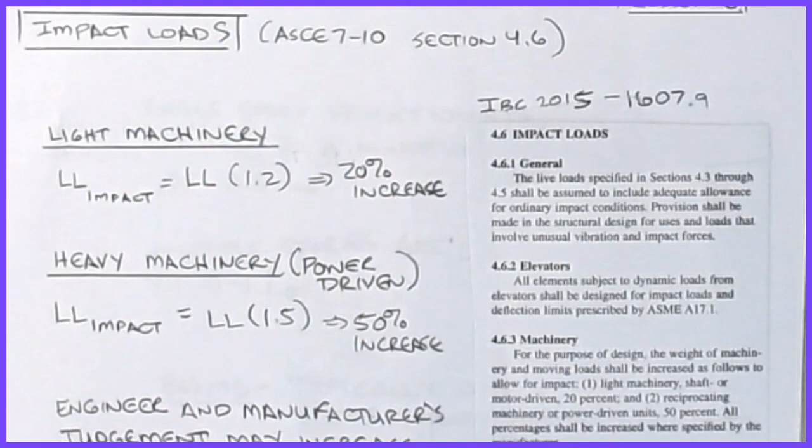So the first topic that we'll talk about is our impact loads and the way that the ASCE 7-10 attempts to deal with those. This is located in section 4.6, and I've copied part of that text for you just so we can reference back to what it's saying. Impact is a load that has some form of energy when it hits a structure, or that it imparts into a structure. It could be like a projectile hitting a structure, or it could be caused by any sort of moving machinery or motors that are being power driven, that will exert force, usually in a cyclic behavior, but not always, into a particular structural form.

Now, impact is very complex. Without getting into structural dynamics, it's very hard to analyze logistically how machinery or impact is affecting a particular structure. Structural dynamics says that vibration and impact response are related to not only the mass of the structure, but also the stiffness of the structure. So a steel beam will behave differently than a concrete beam when the same load is applied to it in some sort of vibration or moving pattern. And so there's a lot of assumptions that have to take place. It's very involved and mathematically intensive to come up with the true form.

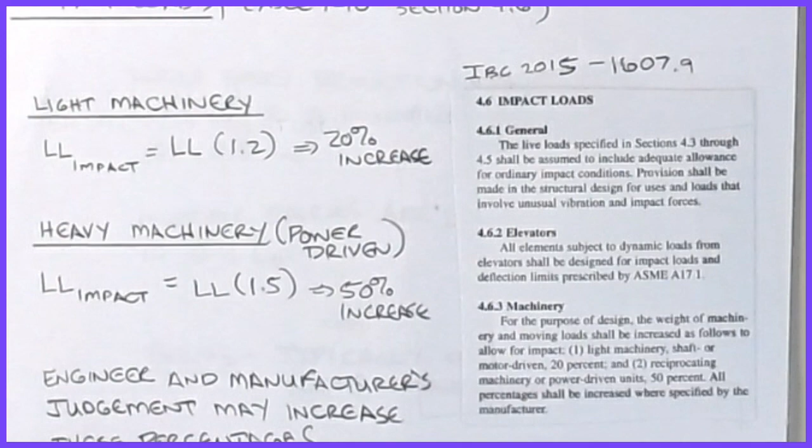So to help us solve this, ASCE 7-10 has some smaller subsections and some assumptions that they based off of practical experience and practical theory, and those are what we're going to focus on for this series. Maybe when we do a structural dynamics seminar, we'll come back around and address this in more detail, but for most engineers doing normal everyday structures, nothing special, nothing unique, just your standard run-of-the-mill type structure, these will give you a good first guess as to the increased loads that are needed.

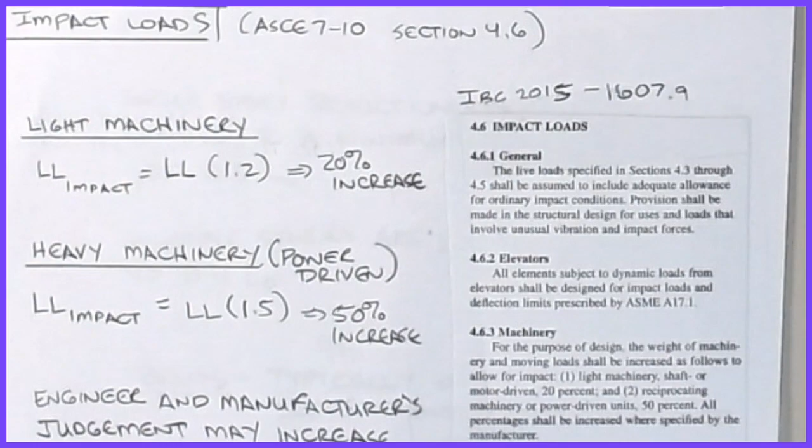So for impact, like we said, this is located in section 4.6 of the ASCE 7-10. You'll see that up at the top on the notes. But it also correlates back to IBC 2015, and 1607.9 is where you find that. The way that the ASCE code handles impact is they basically break things down into: is it a light machinery or is it a heavy machinery? So you've got to watch pretty closely the wording of the machinery types, and what we're looking at is a printing press, an aggregate screen, or some sort of motor driven device that's causing these vibrations or impacts in the floors.

You'll notice that elevators would definitely be a machine that meets that standard, but those are designed according to a different standard. To get into those, you'll have to go find the ASME A17.1 provisions, because not only are they designed for impact loads, but they're also designed for explicit deflection limits. We'll talk more about deflection limits in a later video, but elevators are kind of a special animal, especially because they involve humans, whereas the machines that we're looking at would be some sort of industrial equipment.

So the way that impact is handled is that the industrial machine is split up between whether they're classifying it as a light machine or some sort of reciprocating or power-driven unit. For a light machine, which could either be shaft or motor-driven, they're going to require a 20% increase to the live load. So if you know that the live load being put out by this machine is 40 pounds per square foot, you're going to increase that 20%, and the one that you're going to run your models for these pseudostatic loads for impact would be 48. That would be a 20% increase of that.

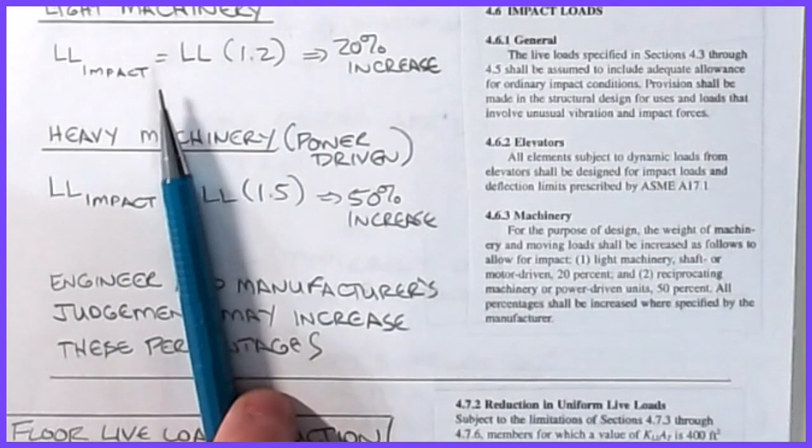Whereas if it's a heavy machine, which is some sort of reciprocating machine or a power-driven unit, 2,000 RPM or something just very, very large. And again, they leave a lot of this up to interpretation. Well, what do you do if you're kind of in between the two?

You have to use your engineering judgment to understand the type of machine that you think you need to be designing for. What lets you sleep at night as you start to do this? Now that being said, recognize that there is a 30% increase between light and heavy. So the heavy, if it's a reciprocating machine or a power-driven unit, they're going to increase at 50%.

And what they're worried about with these power-driven or reciprocating machines is that resonance effect that we've talked about a little bit, in which, as you deflect things, the deflections get bigger and bigger, but that's because of the cyclic nature.

Where we talked earlier about the structural response being related to its mass and its stiffness, there's also another factor, the frequency of the force being applied, and something special happens if that frequency of the force starts to match that ratio of mass and stiffness, or the natural frequency. Now, that's not the true formula for natural frequency, but those are the factors involved.

And so, if those two numbers start to converge to a singular unit, then deflections go crazy and start to expand. Technically they could go to infinity, but obviously structures have material limits.

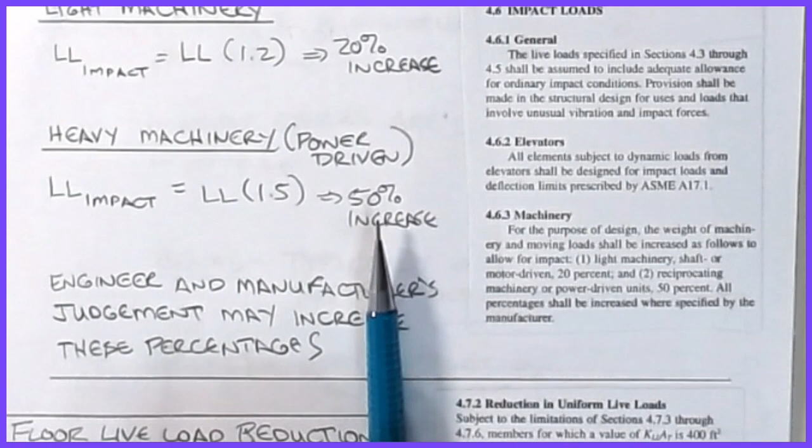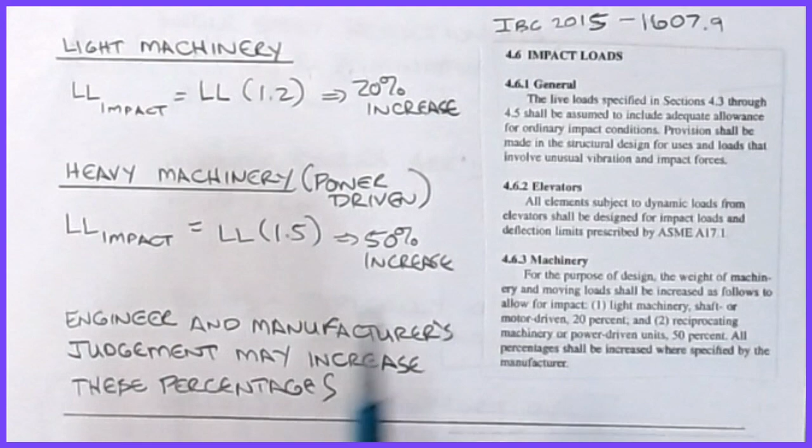Now, there's a lot more to this, but just so we have a sense of how much we're going to increase, we're going to be increasing either 20% or 50%. And again, it is up to the engineer and manufacturer's judgment. Technically, you could increase those percentages. If I knew I was hitting that special resonant frequency, 50% might not even be enough to design for. So that will cover us for impact. Next up will be live load reductions.

Our next section involves the concept of live load reduction. Live load reduction is broken up into two different subsets: one is for floor reductions and the other is for roof related reductions.

If you remember, we defined live load in an earlier video as a load that is non-stationary or has some variability associated with it, that it can move in or out, based on time of day or just the nature of the loading, it comes and goes. Now, live load does not include things like wind or snow. This is most often associated with people loads.

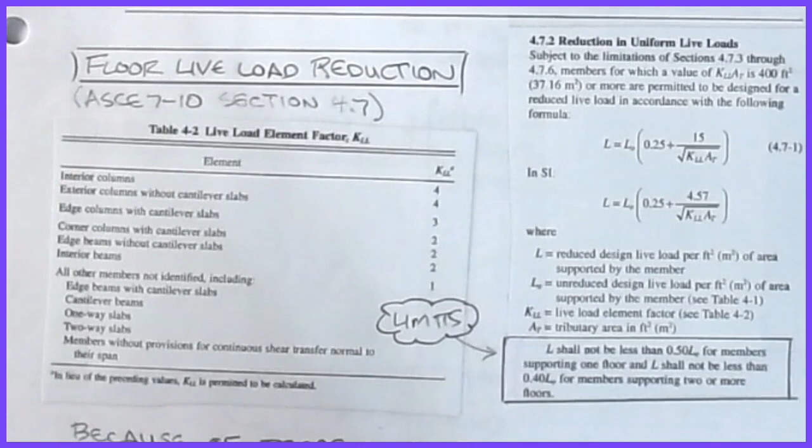Remember that there were some statistics behind the formulation of all of those numerical values. For a residential section or a classroom, we said live load is typically taken as about 40 pounds per square foot, and maybe the hallway outside was 80. With live load reduction, because they're based on probability, we have to look at things a little bit differently.

So I'm going to pull up a small example here. Suppose that we have a live load reduction set up between floor and roof, and let's say we're looking at 40 PSF. I know it's uncommon to get 40 on the roof, but let's just say there's 40 on either one of these areas.

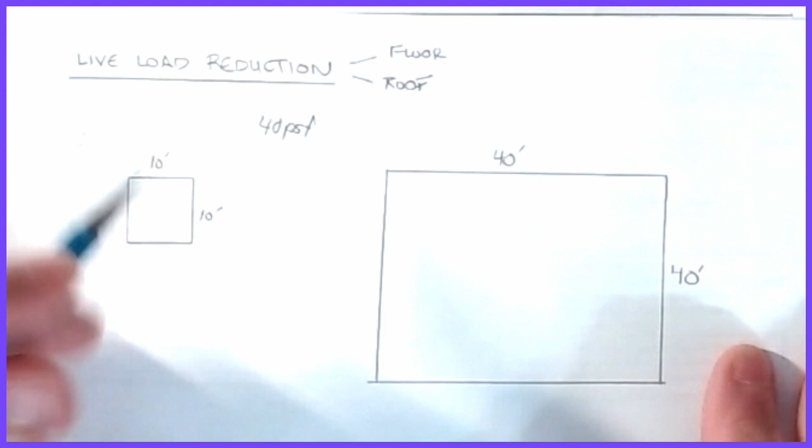If the area where this load is being applied is fairly small, in this case a 10 foot by 10 foot area, maybe a closet or a very tiny bedroom, the likelihood of seeing 40 pounds per square foot in this entire area is pretty large. Because if we take a token 1 square foot area, the probability of loading all of those 1 foot square areas in this 10 by 10 area could be pretty reasonable.

Whereas if this area is 40 feet by 40 feet, the probability that I load up all of these at the same time with that same load is insignificant.

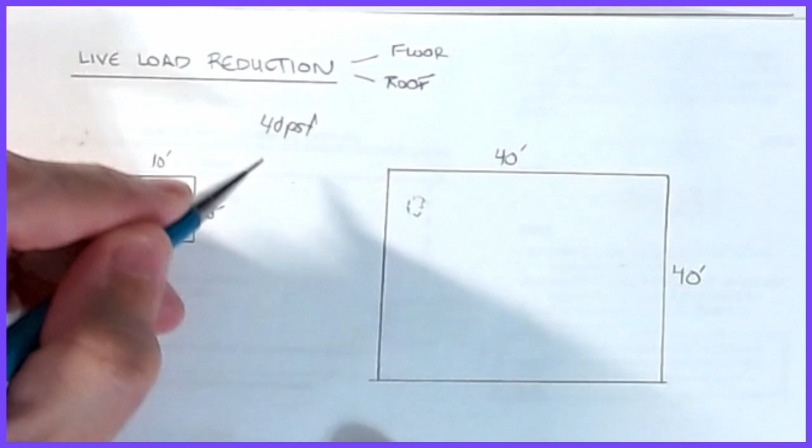The likelihood of that happening is a lot less. This room is a lot bigger, and suppose that you have 20 people that you're fitting in this room. I mean, we're not worried about fire safety standards or anything like that. But getting 20 people into this room, they're pretty well packed wall to wall.

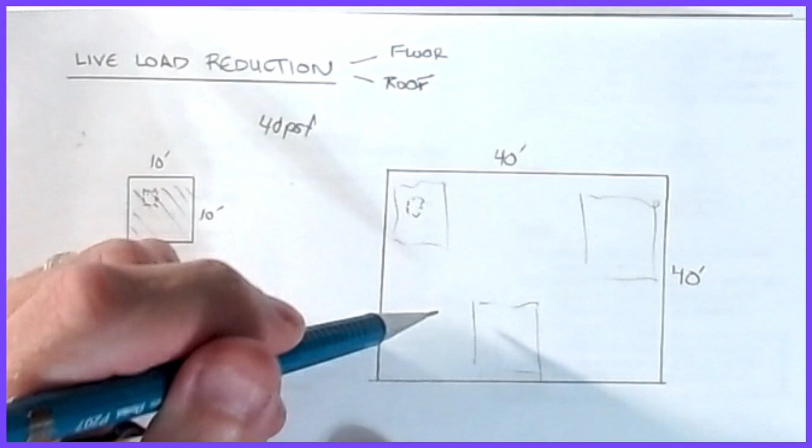Whereas here, maybe they're located over here, maybe they're over here. They all kind of move around, they congregate, something. But the odds of fully loading this whole area are very, very small. Okay, and so what live load reduction is, is an attempt to use some statistical basis to say, all right, we don't need to design this for as much of this 40 pounds per square foot load as we might this guy.

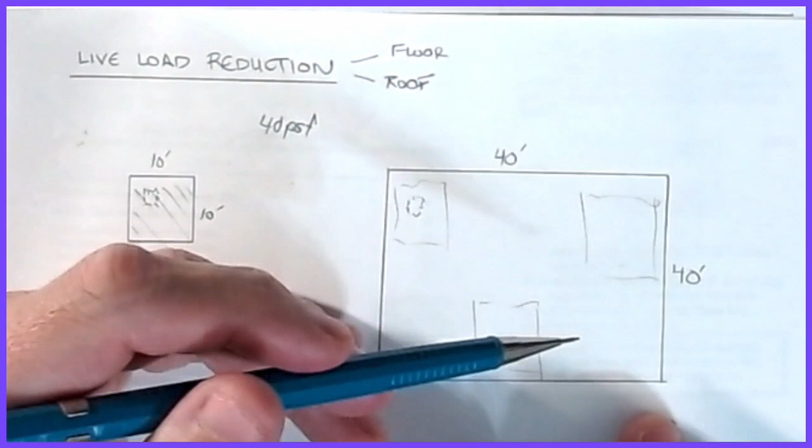Okay, now again, 40 pounds per square foot is still the base. It's just that we're going to reduce it based on the probability of actually loading this entire area. Now, if this is some sort of meeting area or a storage facility, there are some limits on when you're allowed to reduce and how much you're allowed to reduce. And that's the nature of what we're going to cover in this part of the video.

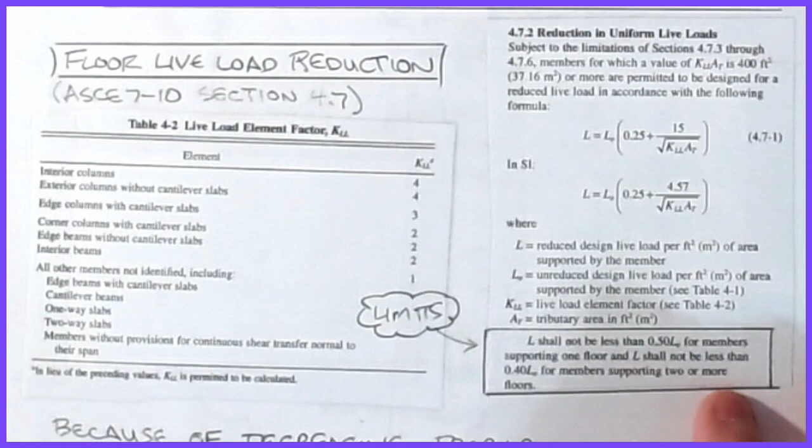All right, so even if it gets to, say, 400 feet by 400 feet, now it's an even smaller likelihood. So there's a correlation that exists between the area that's being loaded and the likelihood of that area seeing all of this load. And that's what these reductions are trying to do. All right, so let's talk a little bit about what the ASCE 7 code sets up as a prescription for it. We're going to start on 4.7.2.

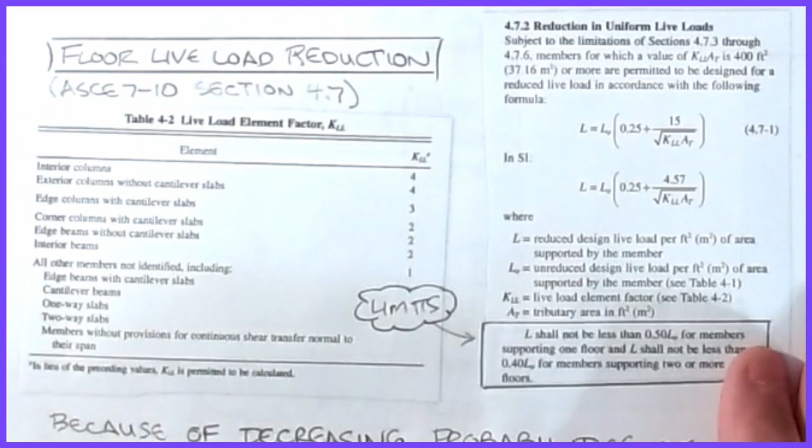There are two formulas associated with it. You've got the US units, which is the top one. That's the one we'll focus on in this class, but if you want the SI equivalent, there's the one below. Notice that all that really changes is this numerical factor, and that has to do with the conversion of AT, and we'll define what AT is in just a moment. The only parameters it takes are your initial live load L naught, a KLL parameter, and an AT parameter.

Now, AT we're going to use a lot in the coming days, and this is known as the tributary area. It's the load that's associated with a particular member, and we'll define those in just a second. All right, KLL has to do with the nature of the structural piece itself. Is it a primary member?

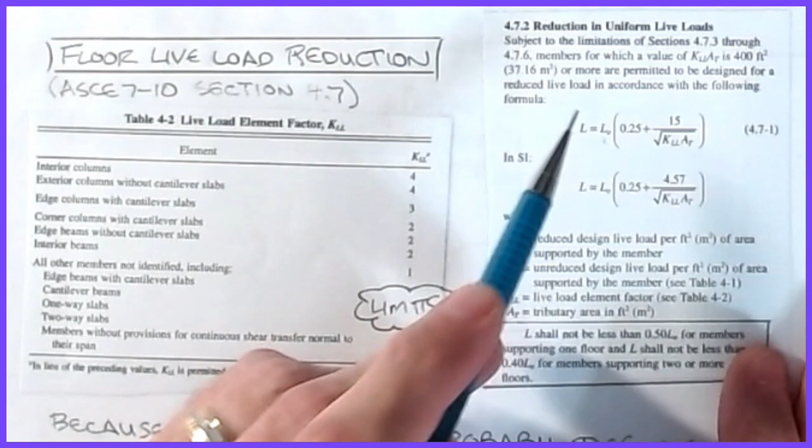Is it a secondary? Primary members being that if a primary member is damaged or removed from a structure, you have huge structural implications, whereas with a secondary member maybe you'll have a localized failure, but the rest of the structure is still standing. So think of, if you lose a column, that's a primary member because big portions of your building will come down. Whereas if you lose just a simple joist between two girders on one part of a floor, maybe you lose that part of the floor, but the rest of the structure will probably survive. That's what these factors are trying to account for.

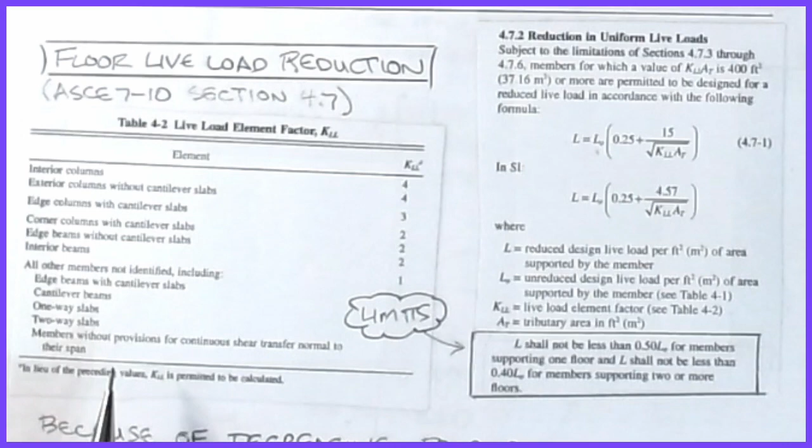All right, so this KLL parameter, which is the live load element factor, you can find in Table 4-2. They're broken down into different types of members. So if you are at an interior column, if we come back to our picture, that would be a column that's located in the interior of the region, something like that over here. So this would be an interior column. This would be an exterior column, and that would be a different factor.

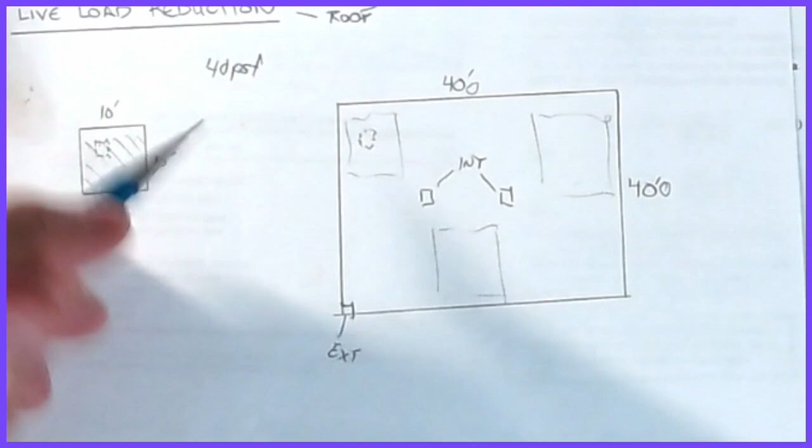So if you're at an interior column, if I lose one of these, the damage to the building will be significantly more than if I lose one of these exteriors, right? And that has to do with, let's just put a few more columns around the border here. We've got kind of a regular framing pattern.

Something kind of like that. That if I lost this corner column, you can see that based off of tributary areas, he's kind of responsible just for that portion of the structure, right? This guy takes that piece, this guy takes a whole lot, and this guy takes a piece there, okay? But realistically, all of the load that's here, and it's not exactly like this, but it tends to want to go to the nearest column, okay?

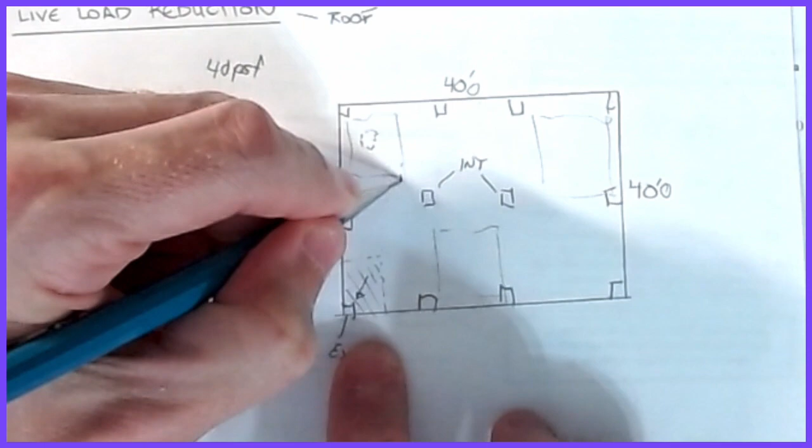Whereas if I go to an interior column, and take this as my shaded region, all of this load tends to want to go to this column. Okay, now again, this is an idealized approach, and we'll talk more about these tributary areas. But that's why you can see that an interior column typically has a whole lot more area associated with it than these exterior. Okay, now the shaded region I've showed here, this is the AT value.

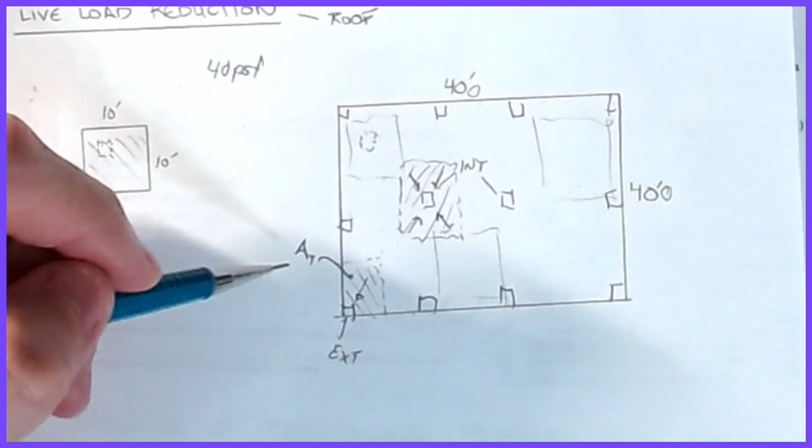Okay, so what it does is it takes basically half of the distance between this direction and half the distance between this, and says this guy will cover half of it. That they're all working equally. Now, again, there are some assumptions that have taken place. We've assumed that the columns in the structure are all about the same size, that one isn't massively oversized compared to the others. Just normal structural type of thoughts are occurring here, okay? And so that's how we start to calculate these AT values.

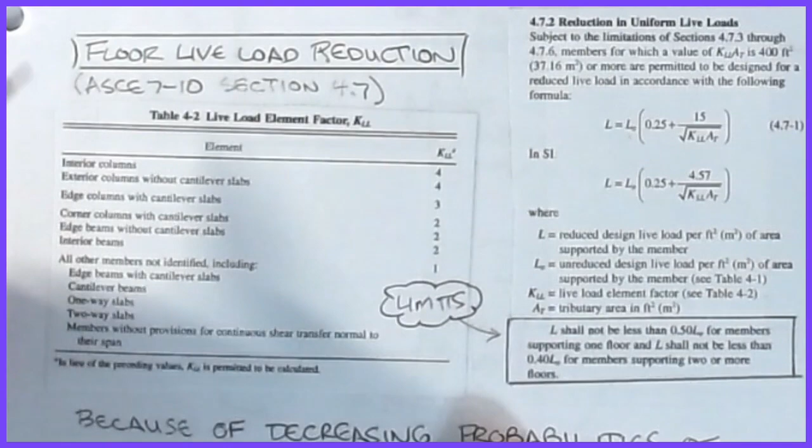Okay, so based off of that area, the shaded region that we're talking about, and then these KLL factors that we're going to show in these tables, you can see that an interior column has a KLL of 4, okay? An exterior column, and this is without cantilever slabs, meaning there's no slab hanging over it that gives it extra load, is also a 4. Okay, with cantilever slabs, it gets a 3, and so forth and so on.

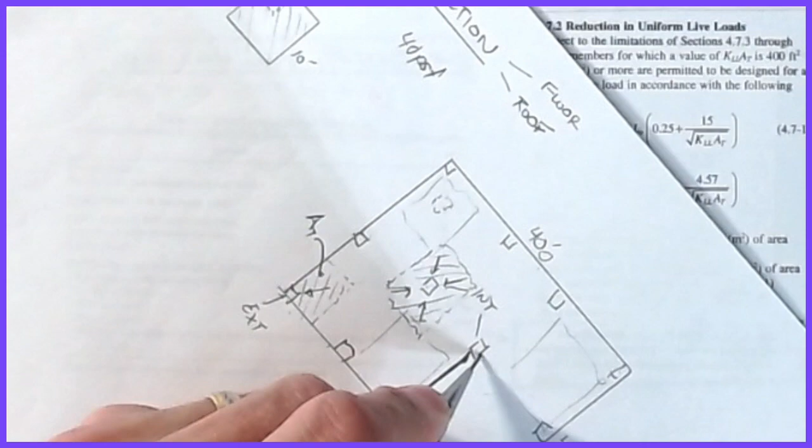You can see that interior beams, so if we look at our shape, this would be considered as an interior beam, a member that connects those two columns, okay? And then even get a few girders laid into our building here. Let's just say that we're taking this beam here in the middle. Okay, that would be an interior beam. Okay, whereas this might be an edge beam over here. So this is an interior. Okay, and this is an edge.

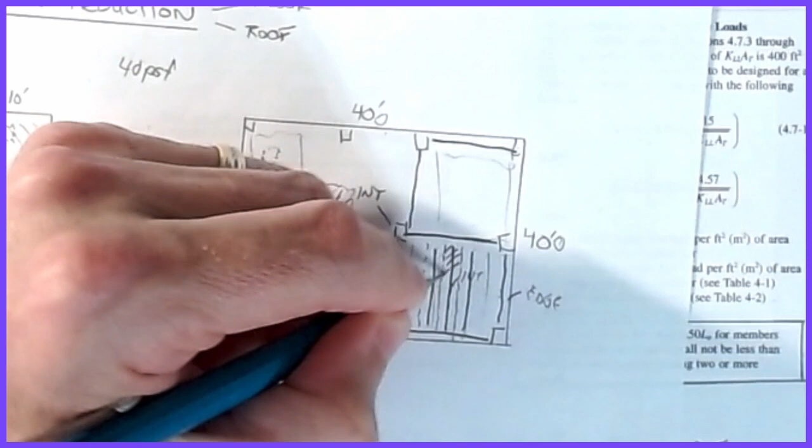Okay, so what happens with tributary areas on this, because typically there are multiple beams running in the framing of this thing, that if this is, let's just draw another dark one in here. Okay, then the tributary area associated with this guy would be that little portion there. It's half of him to his neighbor and half on both sides, both directions. Okay, whereas for a girder, like say maybe this guy, so let me pull this down a little bit.

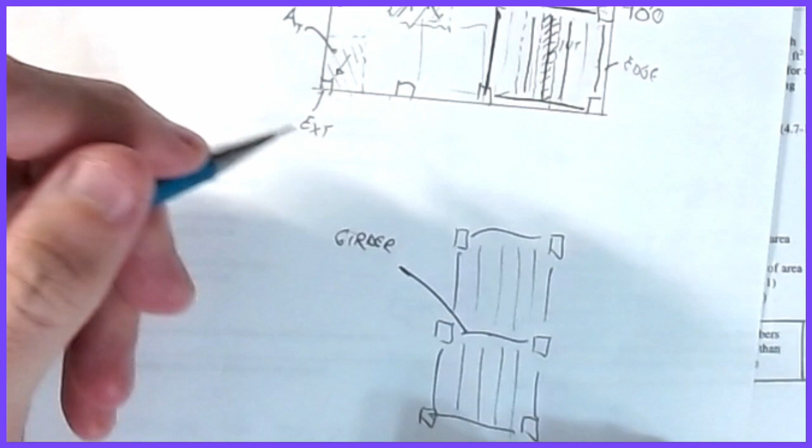And I'm using squares just to kind of represent my girders. Let's look at tributary areas associated with this guy. And again, we've got a whole bunch of framing that could be happening where this girder is holding up a bunch of members. If I'm looking at this piece, we would call that a girder. All right, and his tributary area is that any load that's out here, the load goes from the slab into the joist, and then a little bit goes towards each direction, that he becomes responsible for half of the area between him and his next parallel neighbor. All right, so that would be his tributary area.

And you can see that girder gets a whole lot more tributary area because it's collecting load from a larger number of beams that are sitting on it. Okay, so you can see that even though they're kind of in the same floor area, the area associated with this little sub beam is not nearly as much as what's happening to the shaded area on this girder, right? And that should make sense, right?

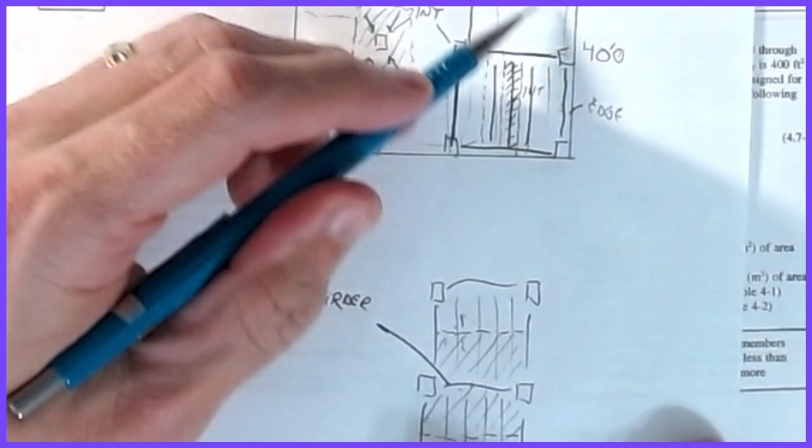Because if I lose this little guy, the rest of this floor is still safe. But if I lose that girder for some reason, now we've got a real problem that all of these floors come down, okay? And so that's why this area associated with the member, this tributary area, is such an important, crucial idea as we start to look at the loads.

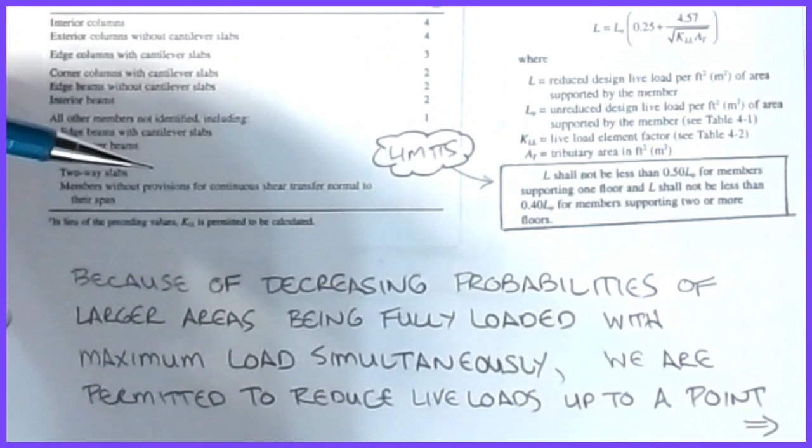Okay, all right, so with that being said, we've pretty much defined our parameters for the live load element factors as well as the tributary areas. Okay, there are some limits that are set forth in what's allowed, or how small can you go, because if we go back and look at our formula here, you can see that AT is in the bottom. So if I had an infinitely large area, I could knock this term out completely.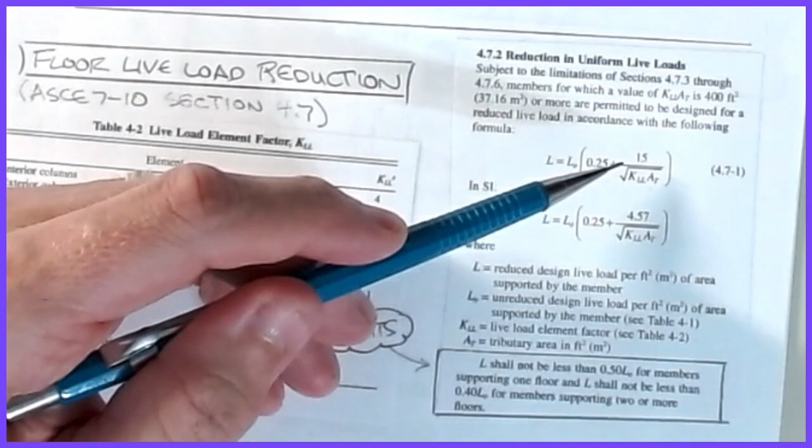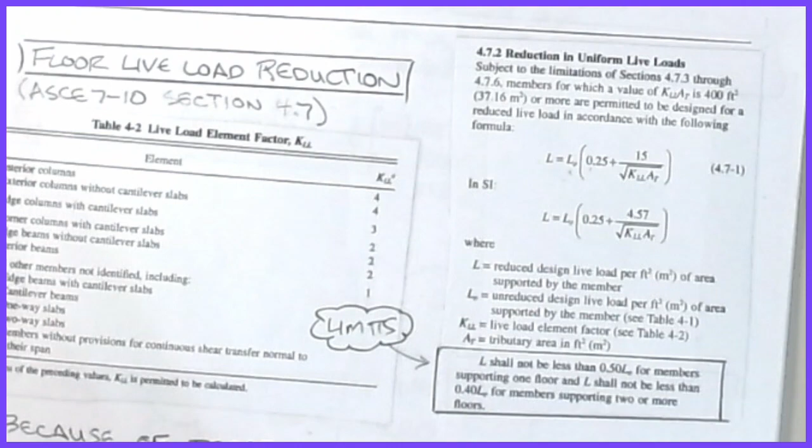Okay, well, they say that, and if I do that, then you're down to a fourth of the load of what you originally had. Okay, well, what's the magic number for AT? We'll talk about that in just a second. So while we're allowed to reduce, we can't get too overexcited and over-reduce it, take it too far down, because I can get to a load that's just not practical. So what kind of values are we looking at? That's where we're headed with all of this.

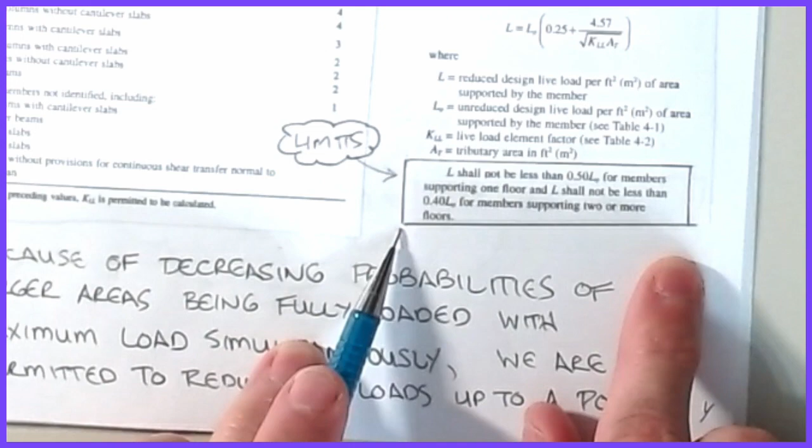All right, so anyway, you've got this table for the KLL factors, you've got the equation to work with. We're in pretty good shape for that. Now, the limit I have on this note is boxed. Obviously, it's not boxed in the code, but I pointed out this is where that limit is set. So L shall not be less than 0.5 L naught, so half of L naught, for members supporting one floor, and L shall not be less than 0.4 L naught for members supporting two or more floors.

Now, for most beams and girders, you're bounded by this 50% limit, but if it's a column on a multi-story building, beautiful quick drawings, right? Comes down and does something kind of like that. Well, then the column that's right here, while we talked about in an earlier picture that for each floor he was associated with a portion of the area on the floor, this column is affected by not only the load on the floor that he's holding up, but he's also being affected by the load of all the floors above him.

And so that's how we look at it, and that's what they mean by multi-stories. Because all this load is coming into this column, and then that load is coming down, and this is building up. As you get higher up in the structure, under the roof, you only have one floor. But for all the other floors, especially for this guy, I would have the effect of the floor above him and the floor above that, or all the floors, if this is a high-rise, multi-story building. That's what we're talking about by these multi-story objects.

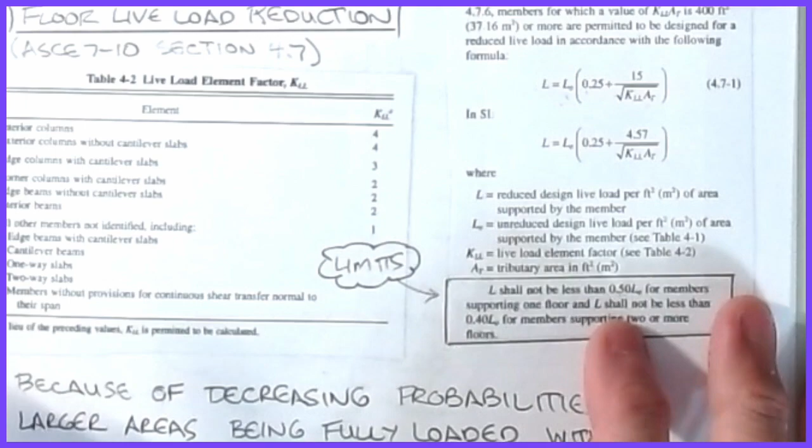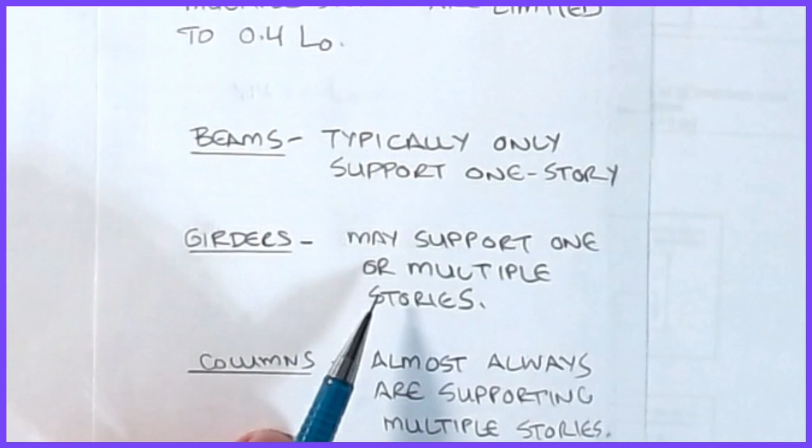But they're all still tying back to probability. So for that multi-story column, you're limited to 40%. Because again, they're saying, well, I may load up one floor, but what are the odds that I load up both floors in the case of that sketch we just made? So to summarize: single story reduction is limited to 50%, multi-stories are limited to 40%. Beams typically only support one story. Girders, depending on how they're loaded, may support one or multiple stories. It depends on, do I have a column coming down?

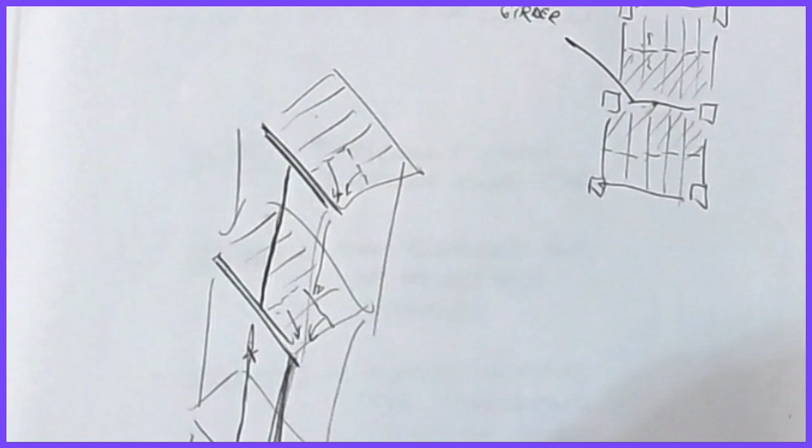Let's go back to this picture. Let's say this is the girder and we're framing things something like this. If my building is something like that, then this guy is only supporting his own floor. But if there were a column coming down here and not one below it, now he's holding up multiple floors. That's why they say a girder can, in certain circumstances, hold up multiple stories. Most normal construction, especially small 3 or 4 story buildings, runs columns all the way down. But not always. So we've got to understand how the load flows through the building when it comes to tributary area. That's why a girder can fall into both single story and multi-story approaches.

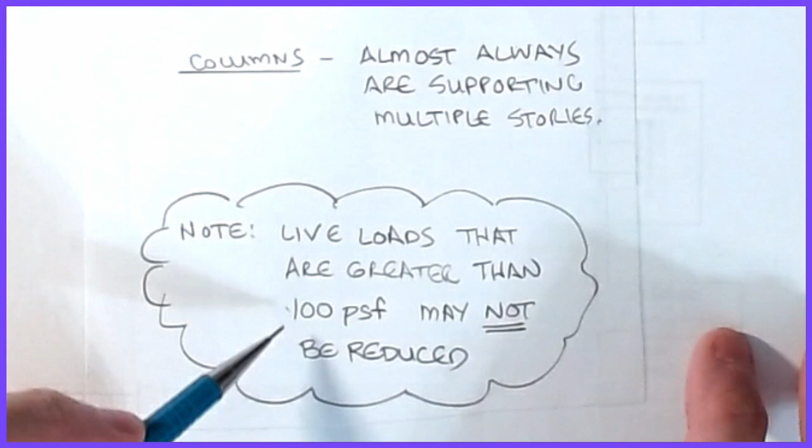Columns almost always are supporting multi-story structures. Now one other restriction that you see in that note is that live loads greater than 100 pounds per square foot may not be reduced. These are considered high occupancy loads. These are your meeting areas, conference rooms, warehouses, libraries, all sorts of storage facilities; they will not let you reduce them because these numbers are so large. But if you're dealing with an office building or a residence that's 40 or 50 pounds per square foot, you're allowed to reduce those. Okay, all right. Let's see.

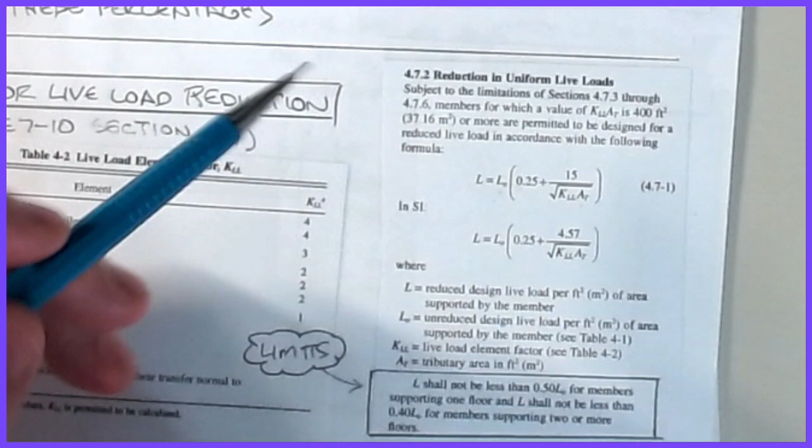All right, now, I do need to point out one last little tidbit that I forgot to say, and I apologize for that. Okay, how do we know what the limit is to being able to reduce? And that shows up in this upper paragraph up here. This has got a little bit of a glare. There we go. Okay, basically, if the product of KLL times AT is 400 feet squared, or 37.16 meters squared, you are permitted to reduce the load.

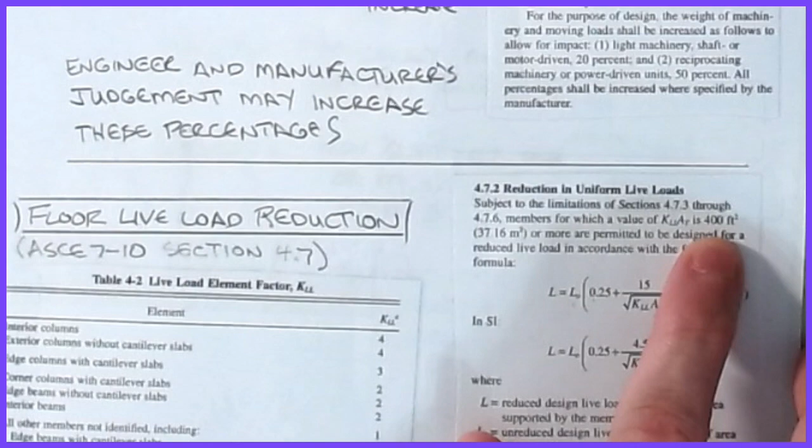Okay, so if you have a beam that's very short, say, or a column that has 100 square foot tributary area and it's an interior column, in that case you would hit that 400 number exactly. Okay, but again, AT is the area of those shaded regions that we were showing you. So this whole area associated with this girder that we looked at over here, that's AT. So if this was 10 feet and this was 10 feet and this is, say, 30 feet that way, my AT is 10 plus 10 times 30, which would be 600 feet squared.

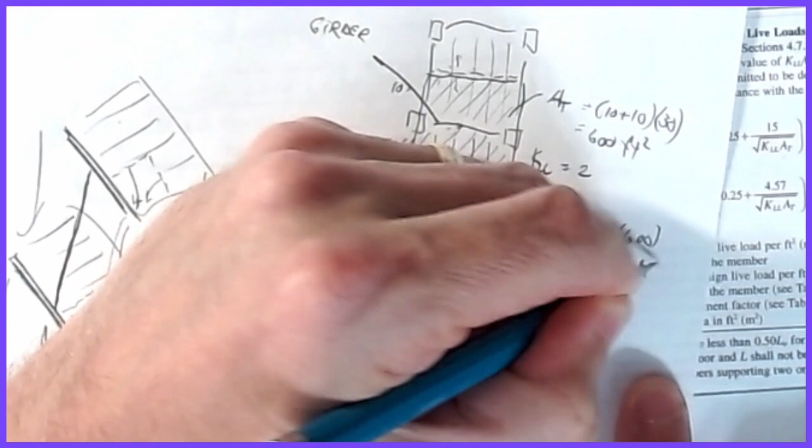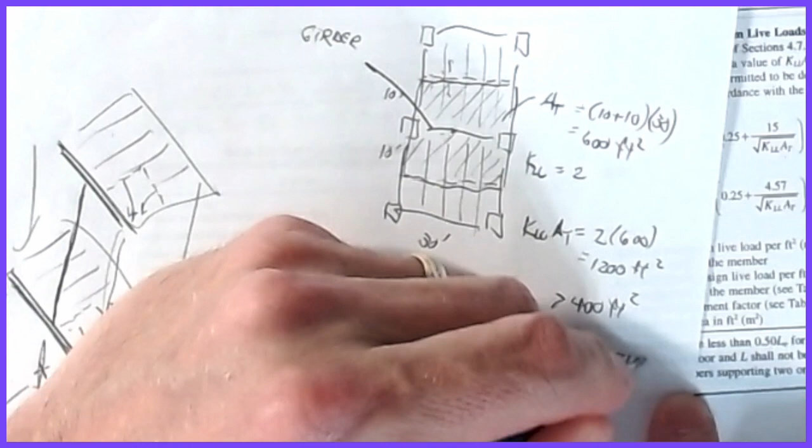Okay, my KLL for that interior girder, coming over to this table, we would be looking at an interior beam. Its KLL is 2. Then KLL AT is going to be 2 times 600, which would be 1,200 feet squared. Okay, that's greater than 400 feet squared. Therefore, our reduction is allowed. And then I could go in and start to reduce the number based off of this, and just plug into the formula, and you would get your percentage number.

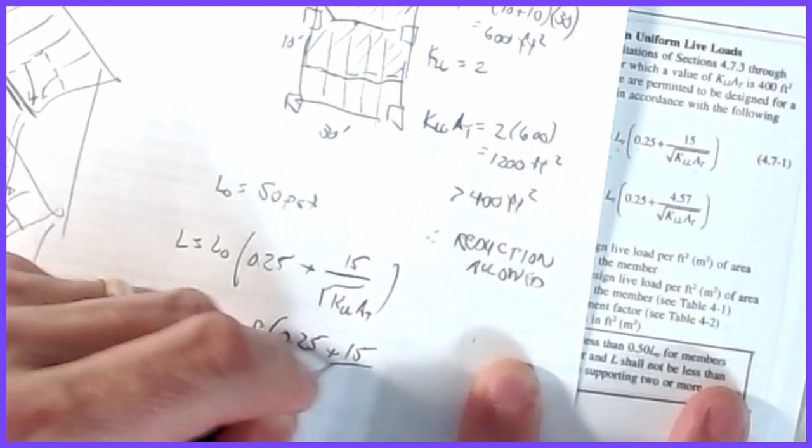Okay, so the original design, if this was an office, maybe it's 50 pounds per square foot. Okay, that's the L naught. Right, so if we just work a real quick example here, this would be L naught times 0.25 plus 15 over square root of KLL AT. This would then be 50 pounds per square foot times 0.25 plus 15 over the square root of 1,200.

All right, I'm going to pause it. I got my calculator here. Didn't have that handy with me. Sorry about that.

All right, I'm back. So this would be 50 pounds per square foot multiplied by a coefficient of 0.683. Okay, so if I multiply that by 50, 34.1 would be what you would design that girder for, based off of the tributary reductions.

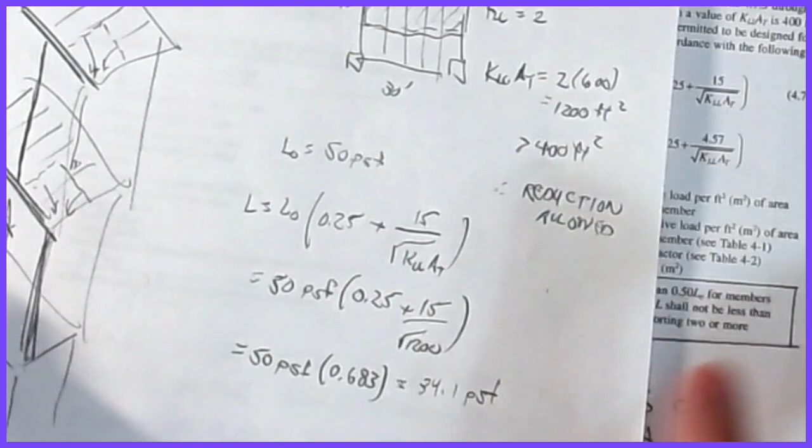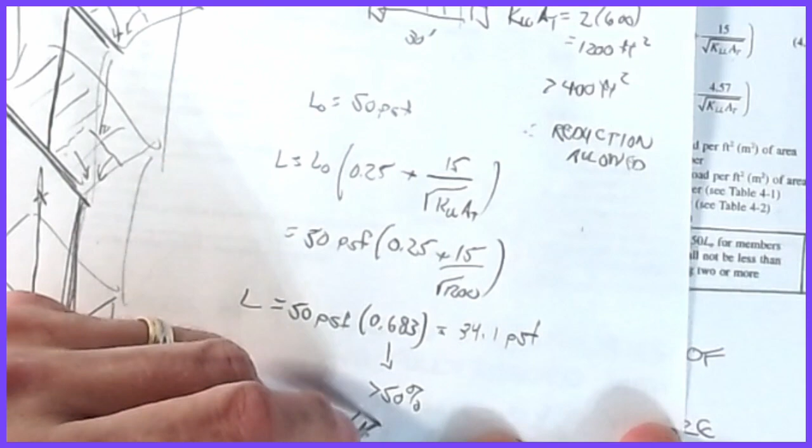Now again, we have to look at the limit. This number is greater than 50%, so then we're okay for our limit, because here's my L. My L minimum that you have to design for is 50 PSF times 0.5 for one floor, which would then be 25 pounds per square foot as the minimum that would be required.

So if I went crazy on the area and dropped this thing, maybe it was a lot bigger building, then if this number was, say, 28%, then I would be bounded by that limit. Okay, but we're still above the minimum, but that's why you've got to check both. So this is what I would model my structure on, 34.1 for a floor live load reduction scenario. Right? Okay, so anyway, that was kind of a crude example, whipped up on the fly, so I hope that made sense to you.

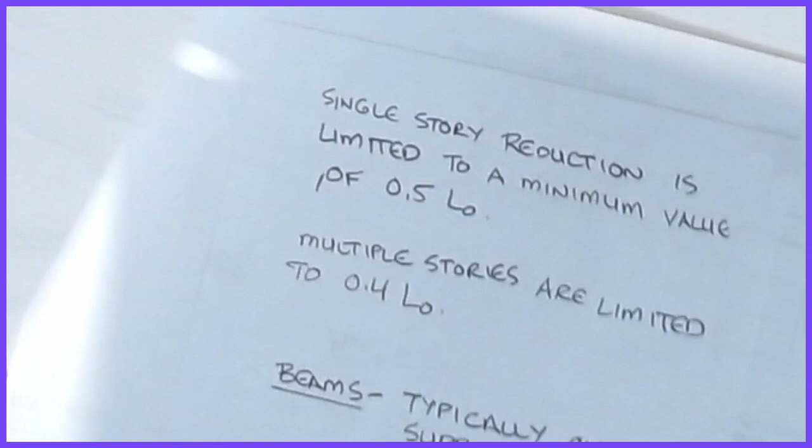The next piece that we're going to look at has to do with, get to the right page here, roof live loads. They're kind of the same way, but they're done a little bit differently. They have a little bit of a different setup to them because of some logical reasoning. Okay, so the typical value for a roof live load is 20 pounds per square foot. Now remember, we separated roof live loads from regular live loads because normally in most structures, roofs are restricted access.

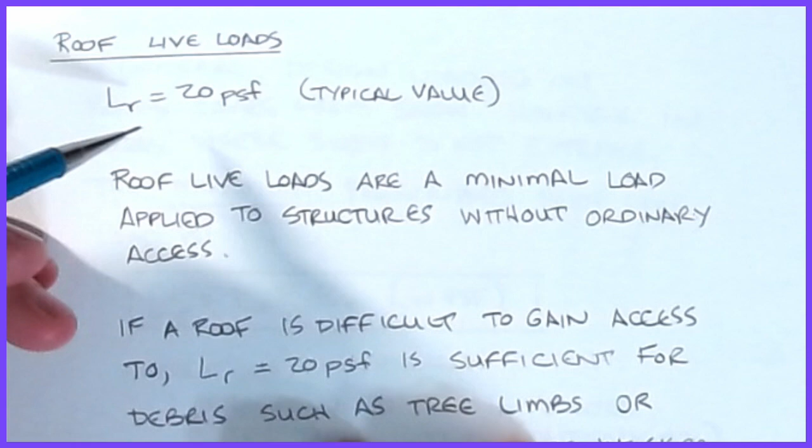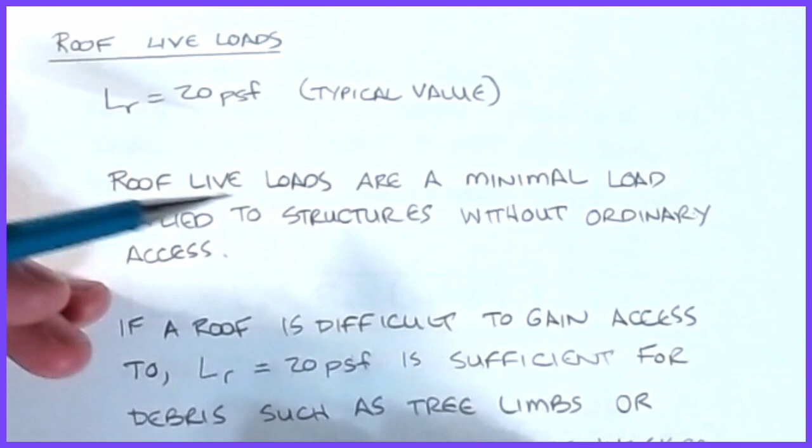This 20 pounds per square foot accounts for maintenance workers up there, the occasional tree limb that falls down onto the roof and sits up there, or a pile-up of leaves, or whatever the case may be. It's just a little bit of this kind of extra load, but it's not the 40 or 50 that you saw in a residence or an office building, right? Because I don't need that much up there.

Okay, and basically these roof live loads are a minimal load applied to structures without ordinary access. Now, by ordinary access, we mean that it takes some effort to get onto the roof of a building. Now, again, people can get on the roofs.

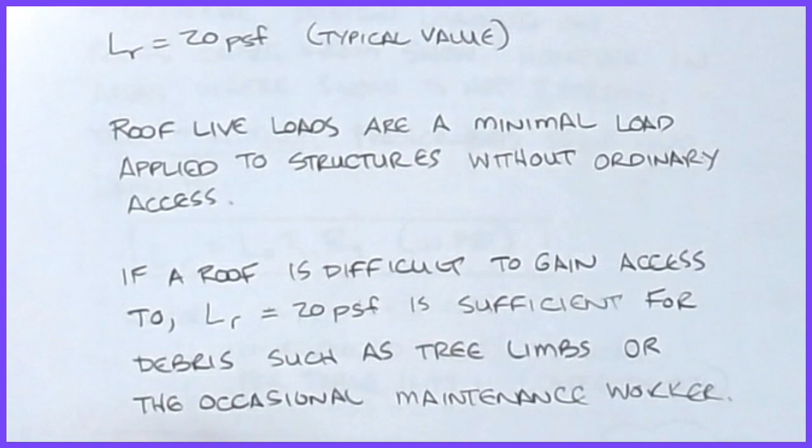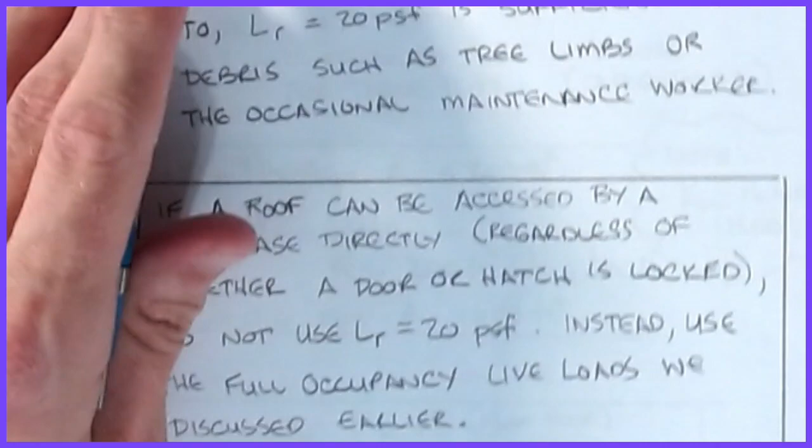I recognize that, but if you don't have a staircase going up to the roof, if it's a ladder that you're climbing, or there's a lock on the hatch that gets you to the roof, it's pretty safe to call that restricted access. Okay, so if it's difficult to gain access to, LR of 20 pounds per square foot is sufficient for our limits. But if not, if you have a staircase that goes up to it, if it has an observation deck, then I'm using the normal live loads associated with it, okay?

And that's kind of what I'm trying to say here. If a roof can be accessed by a staircase directly, regardless of whether a door or hatch is locked, don't use the 20 pounds per square foot. If it's got a door on it, or a staircase going to it, I use a normal design floor load on it. Right? Because at some point, somebody's going to go up there and say, hey, this is a great place to work, or a great place to sunbathe, or whatever,

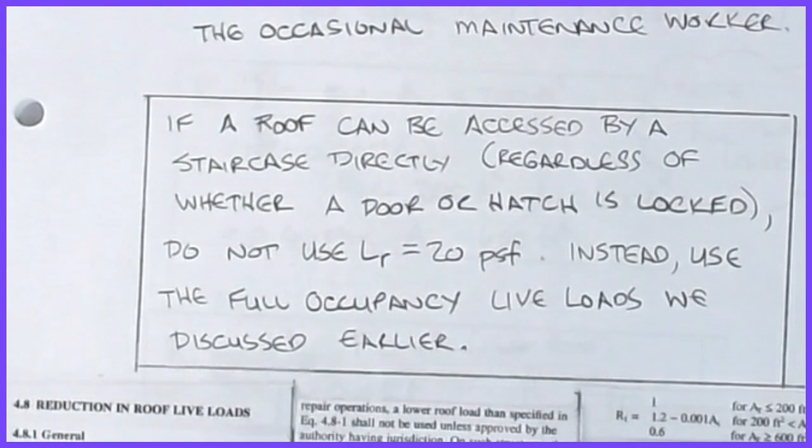and then they're there, and then all of their friends start coming over. And so again, engineering judgment on how hard it is to get on the roof. If you've got to scale a ladder, yeah, it's pretty hard to get on there. But if not, well, then you've got to kind of consider it that way. All right. So now for roof live loads, it's done in a very similar fashion. It's just that the formula is a little bit different. And so the reduction in our roof live loads is done in accordance with this.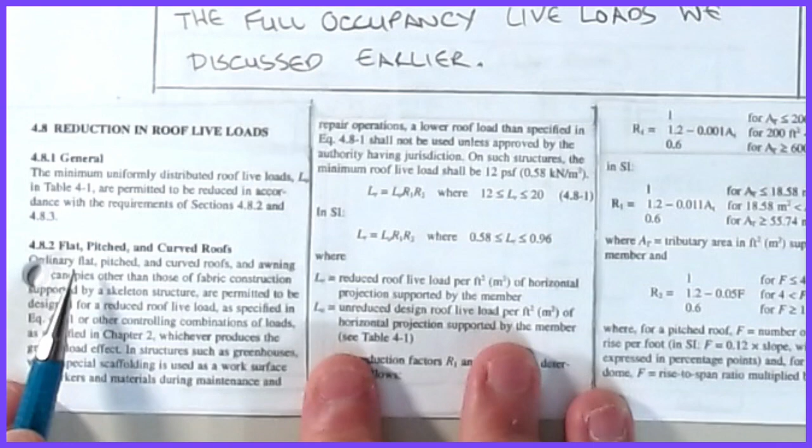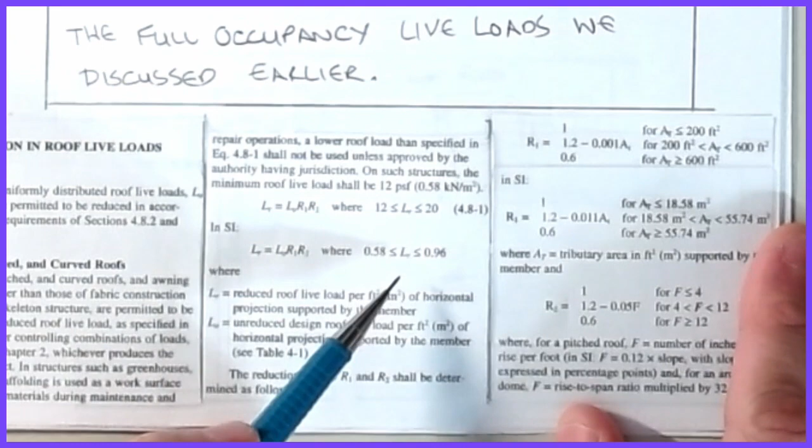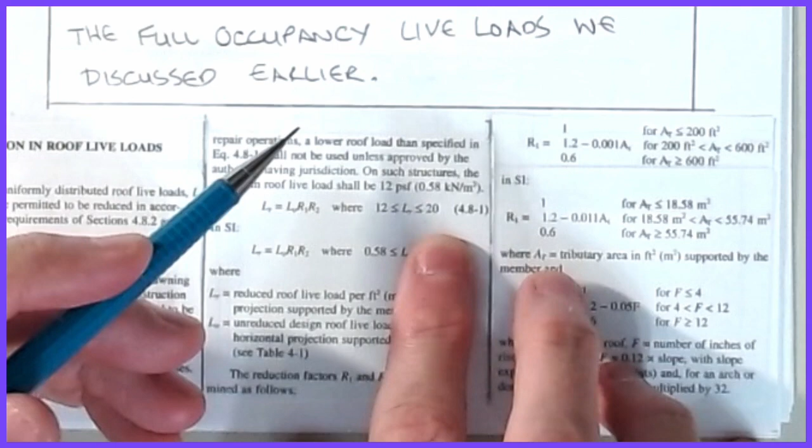Now roofs are broken down into flat, pitched, and curved roofs. And the formula has a section that looks something like this. LR is L naught times R1 times R2, and these factors are given over here. And then for SI units, it's still the same formula, but your limits change. Now you'll notice that the limits on the roof live load, you can reduce those between the range of 12 and 20. So most of the time, most structures, I just call it 20 and I'm done. I just take the upper bound limit on that thing.

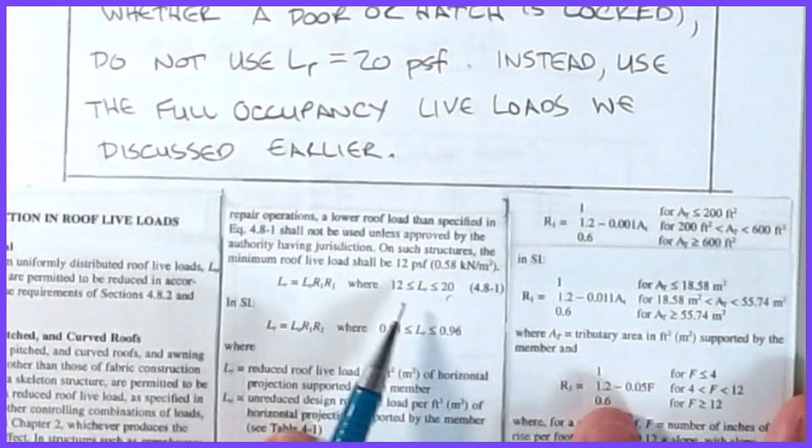But if you had a very large area, maybe it's a warehouse or a distribution facility or something, then it might be worth your while to sharpen your pencil. But generally speaking, that's not a huge swing. You're starting out at 20 anyway on the upper end. And like I say, if you have access to the roof, and it's not getting this 20 pounds per square foot minimum, you're not using this formula anyway. You're using the old floor live load scenario.

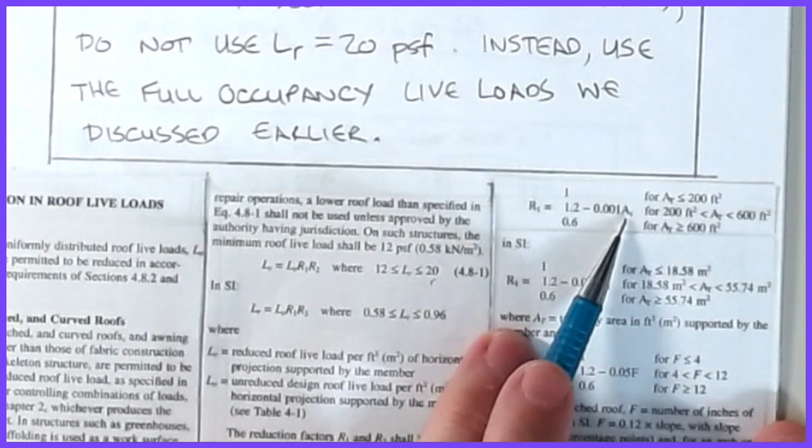Now, the factors that we have: for R1, it's kind of a step function, if you will. It's 1.0 when AT is less than 200 square feet. It's 1.2 minus 0.001 times AT, where AT is the tributary area associated with the member that you're trying to reduce the load on, and you'll notice that's between 200 and 600 square feet. And then 0.6 for anything greater than 600.

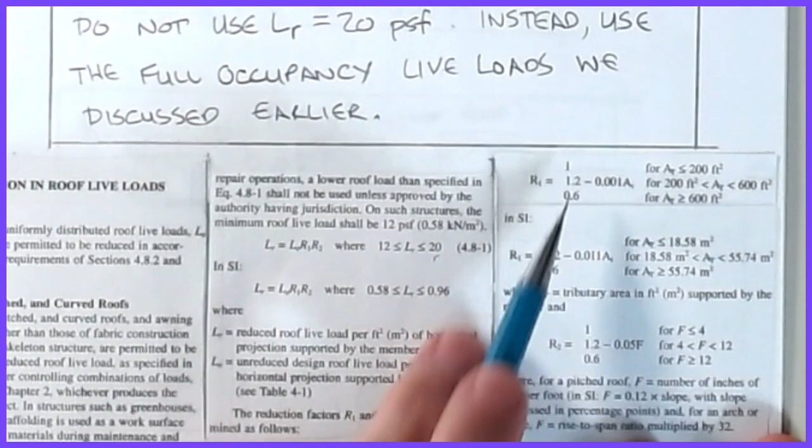And then the R2 factor is kind of a slope factor, if you will. You've got the area relationship, but then you also get the scenario of if my roof looks something like this, for fairly flat roofs, what we're defining is this is 12 and this is F. That's the F coefficient, the number of inches per foot that the roof rises. So if you're looking at a very flat roof, F is a very small number. It doesn't even look pitched at all, but you kind of get the idea.

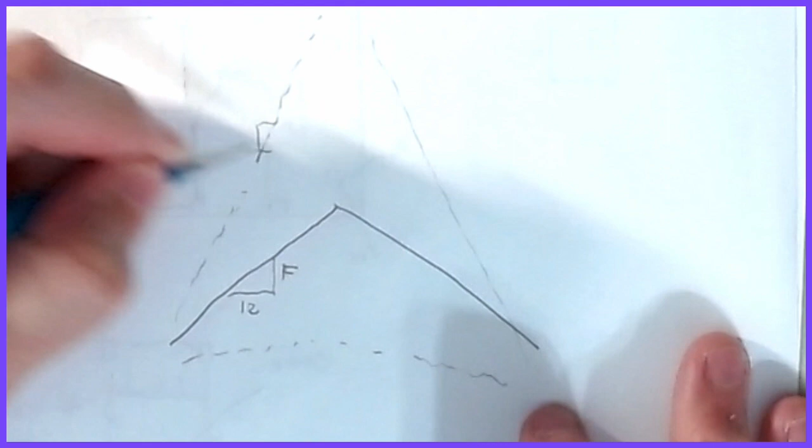Whereas if F is very peaked, the way I remember the effect of the roof factor is if I put something on a steep roof, it has more of a tendency to fall than if I put one here, right? This guy isn't going to move or be relocated based on the pitch of the roof. Now this will be an important concept when we get to snow design in a couple of lessons, that the steeper the roof, the less the snow load, all right?

Think about the ski chalets in the Swiss Alps, right? They always had a roof structure that had a slope of like 70 degrees. Whereas most normal residences in the U.S., we're looking at more like a 4 on 12. That would be a normal pitched roof.

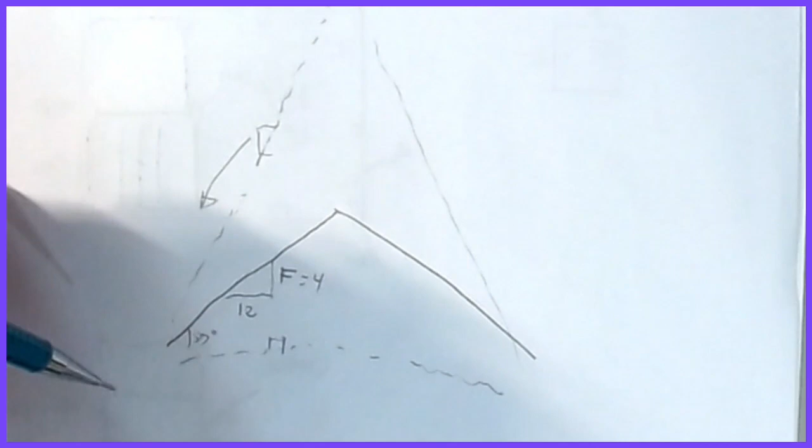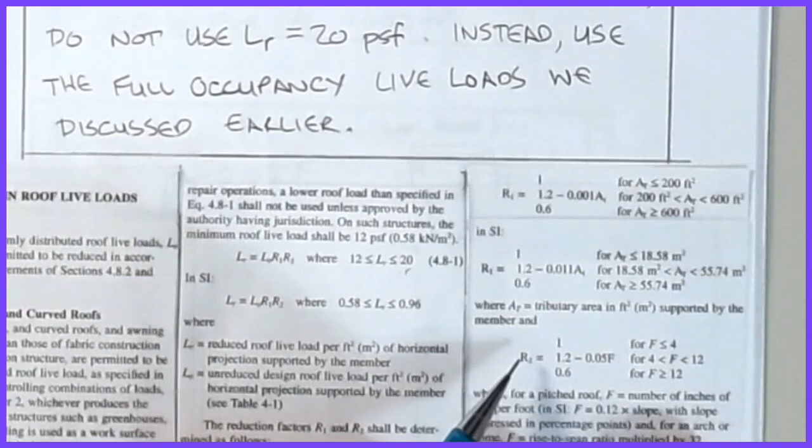So again, if F is less than 4, this is considered as a flat roof. 1.2 minus 0.05 F is for 4 to 12. So a 12 on 12, that's up to 45 degrees. 4 on 12 is, like I say, more like 30 degrees. And then 0.6 for anything that's steeper than that. And then once you have that, it's just a matter of plugging into your formulas. Pretty straightforward. And so I'll show you this. This is what we just talked about. Just kind of wrote it out a little bit more clearly, hopefully.

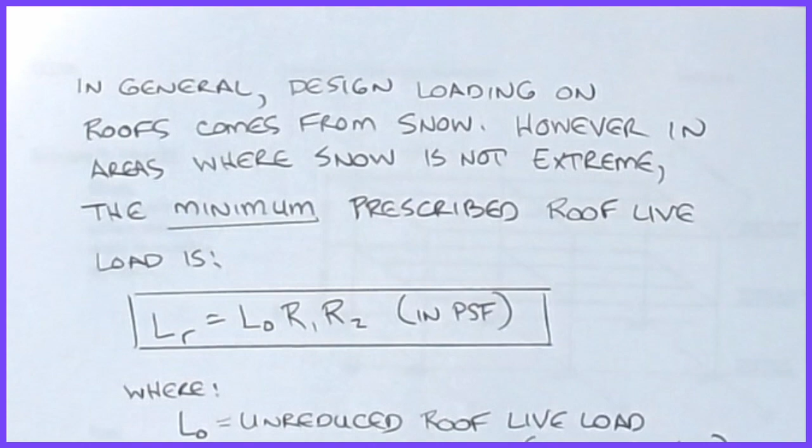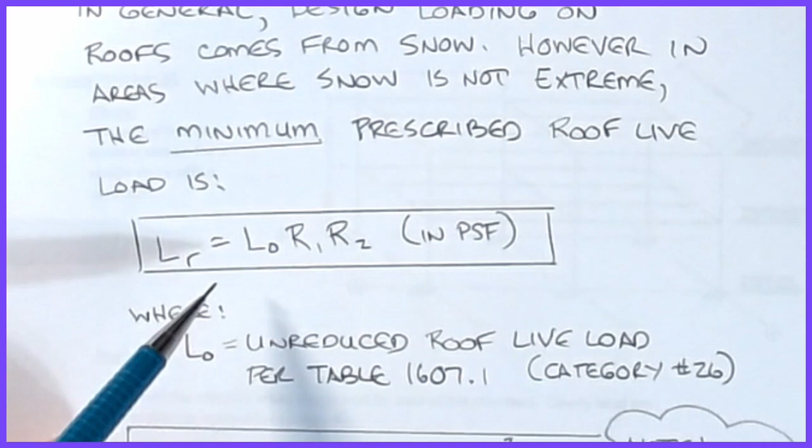In general, the design loading on roofs comes from snow. However, in areas where snow is not extreme, maybe you're in the tropics or southern Florida where there's not a lot of snow, then the minimum prescribed roof live load can often be the controlling factor, and that's why we have to look at it. But like I say, if you're living in the Upper Peninsula of Michigan, the roof live load isn't the problem. It's the snow that's going to be the controlling factor. But you have to check both. You have to check all, right?

Because you never know when that building's going to get up and leave Michigan and move to Florida, right?

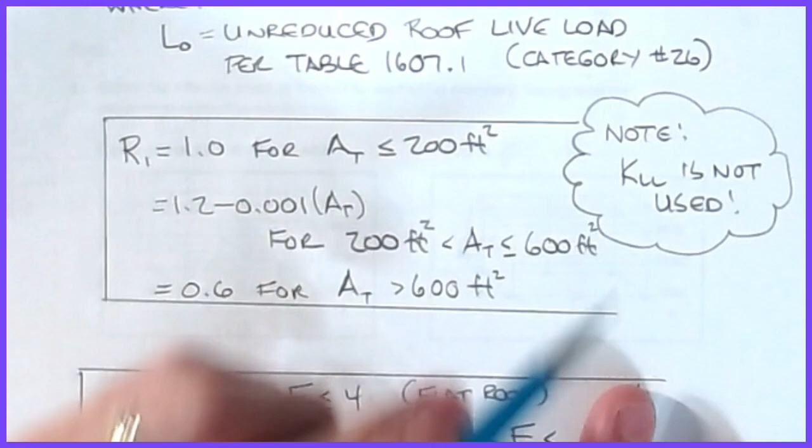Sorry, that's a joke. All right, so we have our unreduced live load. That's the L naught. That was our 20 that we were looking at. And then these are the factors that we just talked about. One thing to point out: this is AT less than 200 square feet. Remember when we did the floor beams, it was KLL AT. So the KLL was used based on the type. Remember, for roof, it's not. It's just a pure area calculation, right? So take notice that KLL is not used in these roof reductions.

And then the R2 factor, which is the pitched roof. Again, we said this was the flat roof one. This is if it's reasonably shallow, and this is for very steep roofs for those factors. Then you just plug and check and do everything the exact same way that we did before. All right, so I hope that kind of helps explain how area reductions are set up for you. I think that's all for today. I hope that it's clarified how the calculations are done and the lower limits that are set. Again, they're not overly difficult, and in a pinch, if you need to, you can reduce the loads to sharpen up your building.

But if I'm doing a preliminary analysis, a lot of times I don't even run the reduction numbers until later on, until I'm sure, because if you have a layout and you do all your reduction numbers and then somebody changes the geometry or your column centers move, then all of your area calculations are affected. And so this is normally something I look at on the back end as a check, but as you get more experience, you get a little faster at it, and you get more of a sense of when it's going to be a problem and when it's not.

For most normally framed structures with columns that are 40 feet on center, you'll end up reducing a fair amount of load. If it's an interior beam, typically beams are 4 foot on center. It's 40 foot long. That's 160 square feet. It's an interior beam. Multiply that by 4. Yeah, you're reducing that guy. In columns, you're definitely reducing. So you've got to watch the limits. But if you get into really, really small structures, then you can't even reduce anyway. So again, all of this ties back to probability. So anyway, I guess that will do it.